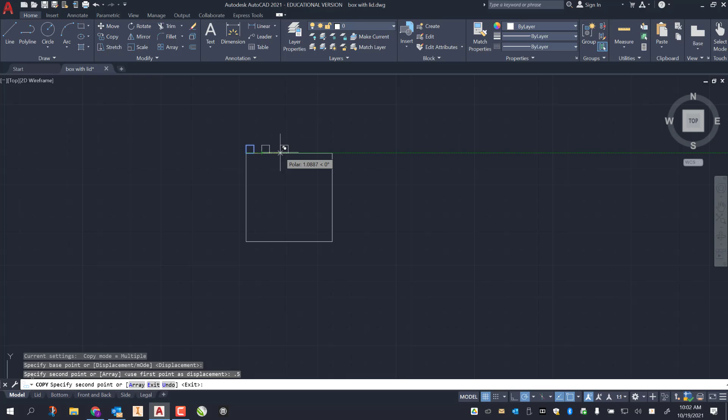I can right click, grab the corner, left click, slide this over, type in 0.5, enter. Slide over to the right a little more, type in 1 and enter, and then escape to get out of my copy tool. So now that I have the 3 fingers that I need, now I need to move them over 3/4 of an inch, or 0.75.

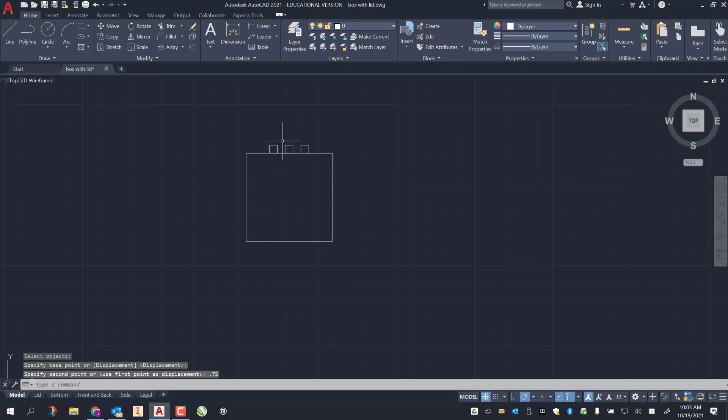So I'm going to use the move tool, which is up here, or I can just type in M and enter. I'm going to select just those 3 squares that I drew, right click, pick my point that I want to grab it from, left click, drag that over and type in 0.75, enter, and that's going to move it right where I need that to be. Then I can press escape to get out of my move tool.

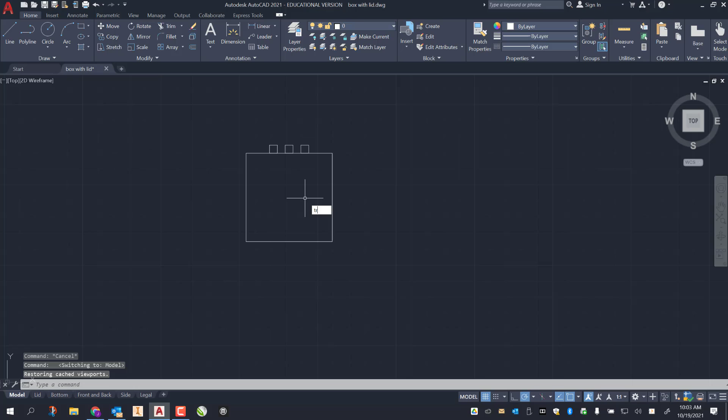So now that I have my fingers where I want them to be, I just need to trim off those 3 spots. So I just need to trim. So the shortcut for trim, TR, enter. And I just want to trim off where those 2 connect. So I just go ahead and trim those. And then escape to get out of my trim tool. So now that I have these fingers here, I want to get them on the other 3 sides.

So before I do anything, the first thing I want to do is go down to my Osnap tool, which is down here, which is your square with the little square in the top left corner. Click on the arrow next to that, and I want to make sure that my midpoint is checked off. So it should be checked off. If it's not, just make sure you have a check next to midpoint, because that's going to be extremely important here.

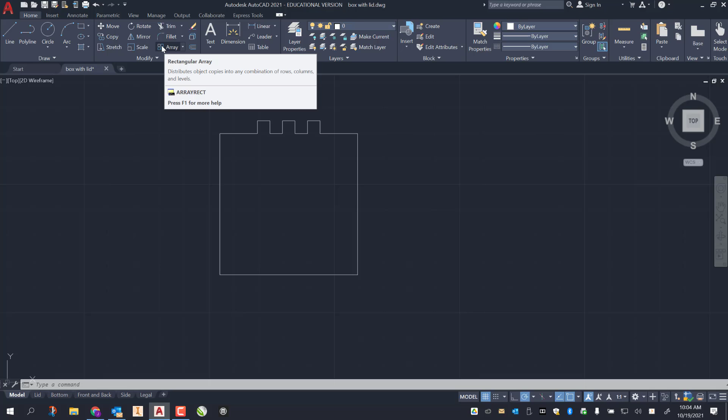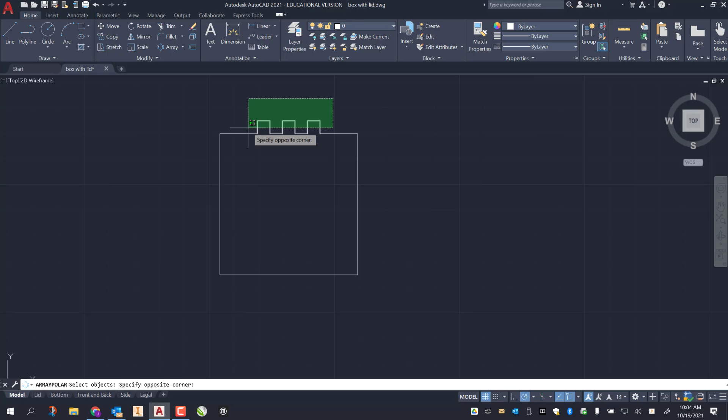So I'm going to go up to this array tool, which is up in the top. I want to click on the little arrow next to that. It's going to give me a drop down, and I want to go to polar array. And I select polar array. Now it's asking me to select my objects. I want to select just my fingers that are on here. Not the pieces that are between them, just the outsides of those fingers. I want to right click.

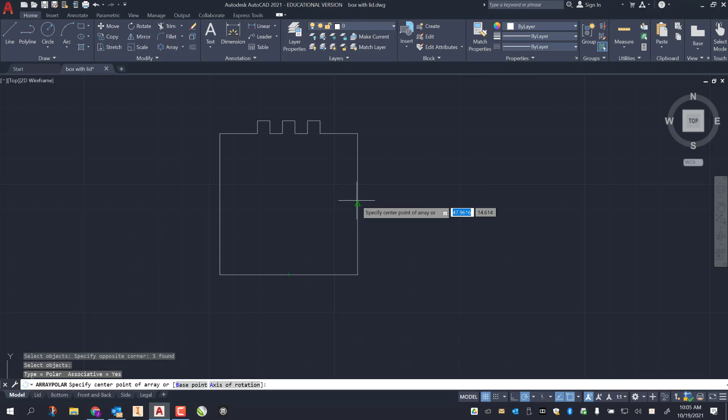Now it's asking me for my center point. So I'm just going to drag my mouse till it shows my midpoint here. And then I'm going to come down to my bottom. I'm going to drag that straight up, and it should lock to my other midpoint. And I want to make sure I get those 2 midpoints to intersect. And I left click, and now you can see it arrayed them around that center point.

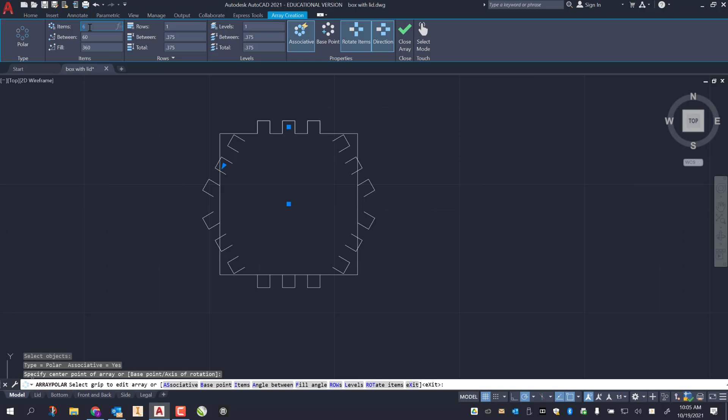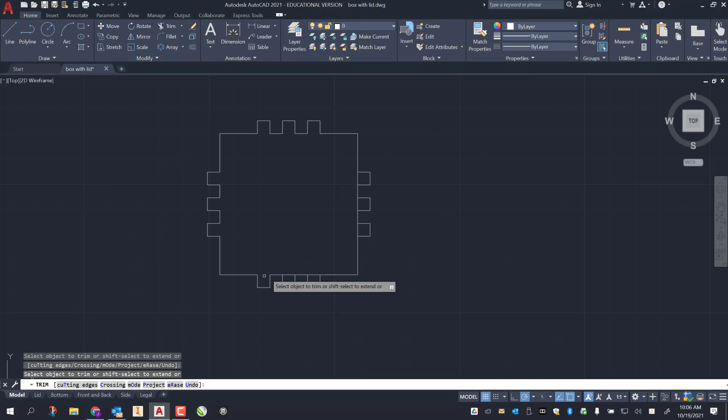So now it's doing it 6 times. So I only want 4. So I go up to the top here, I highlight 6, type 4, enter, and now you can see it's brought those 4 times around. Escape to get out of the array tool. Now I just need to trim the insides here. So I go back to my trim tool, TR, enter, and I trim off the middles. Escape to get out of my trim tool, and my bottom is all set.

So now all I have to do is get this into my paper space, put some dimensions on it, and then go ahead and submit that.